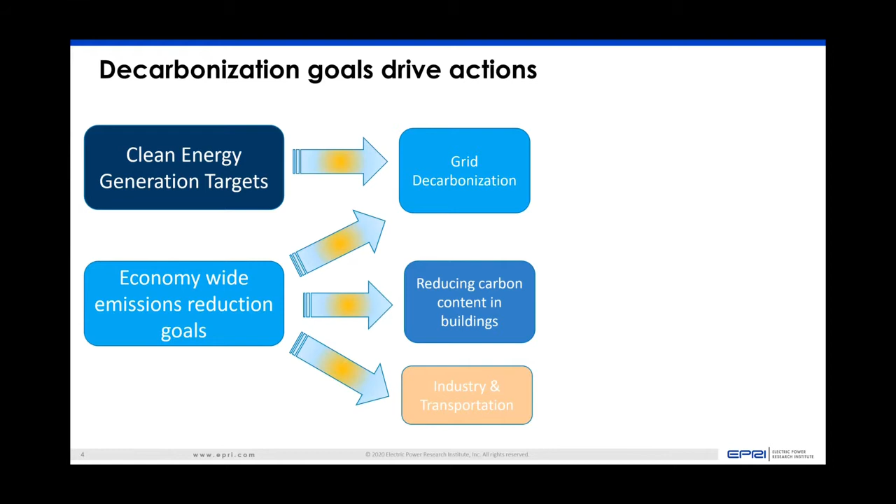So one of the key things is that as the grid gets cleaner, it makes it easier for cities and communities and states to get to the economy-wide emissions goals. But when you have a clean energy generation target, it mainly drives grid decarbonization. And how do they translate back into the building side? So the grid decarbonization is your driver for customer flexibility, demand response, storage, etc.

And then the building decarbonization targets, which are driven by the economy-wide decarb targets, then drive efficiency, electrification, embedded carbon in buildings, as well as low carbon fuels. And there's some interesting work going on in low carbon fuels, like getting hydrogen instead of natural gas into buildings, especially in Europe right now.

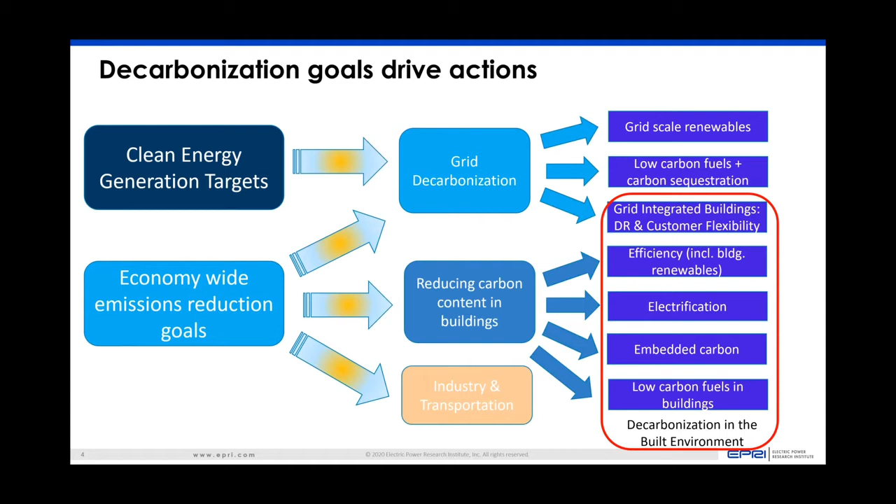So where are we with electrification? There is a lot of interest in electrification. There's a lot of efforts going on. City of Berkeley, you guys have been doing a great job trying to have that market transformation happen. But then there's also challenges that we are running into, right?

As we try to decarbonize our existing building stock and do electrification, how do we get through that peak of inflated expectations, get into that slope of enlightenment where most of our customers and most of our homeowners and builders feel like, hey, electrification is the way to go, that building electrification really helps them to get to their final targets.

So I call this our big challenge, which is how do you decarbonize our building stock at $1 a square foot? We all know what happened with the $1 per watt challenge with solar and how it helped solar scale, all the technology work that went in, the policy work, permitting work. Now, how do we do the same for a building stock? How do we attain this target of decarbonizing our building at $1 a square foot?

So if you think about it, if somebody has a 2,000 square foot home, how do we get the cost of decarbonizing that home down to about $2,000? So that's a pretty big challenge today, but hopefully there are ways to do it.

Quick question, Ram. Yes. Is there anything that might be whistling? A few of us can hear this. Like if I mute my computer, the whistle goes away. So I know it's something coming through Zoom. Do you think there's something in your background that could be making a very high-pitched whistle? Wow. Okay. I don't. I know you're like a technologist, so I'm not sure what you have around you. But don't worry, it's not bad. Okay. Sorry. Is it better? Perfect. Okay. Thank you.

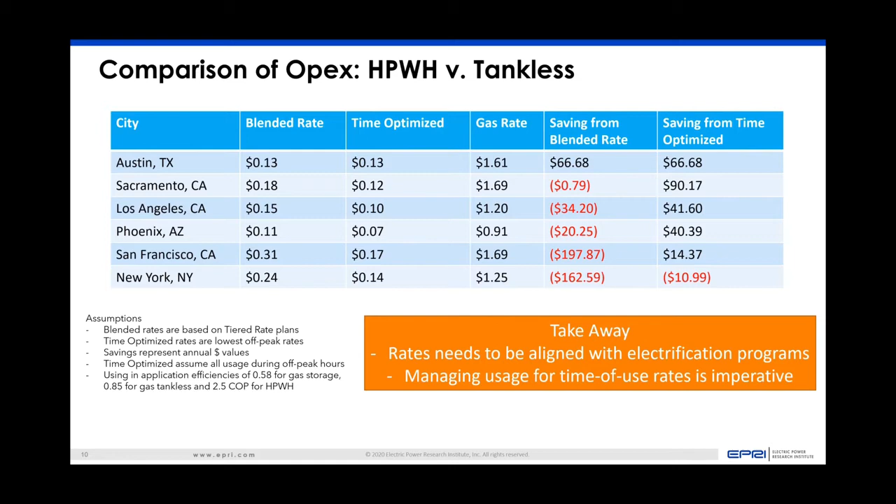So the way we look at it is, okay, flexibility, we should start looking at it and pricing it as a grid resource. And part of that would mean that we need to have open access, open APIs to battery storage, to heat pumps, to heat pump water heaters, so they can be managed as a grid resource, whether by the grid operators or by third parties. But they are not by itself a carbon savings measure within buildings.

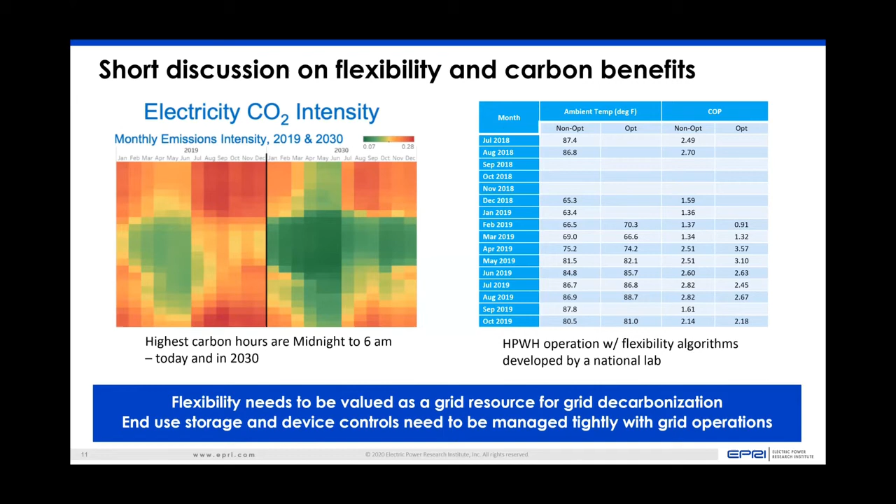Okay. That whistling is coming back a little bit, and I want to follow up that because that's sort of a tragic amount of efficiency loss, but continue. Thank you. So let me keep going at time.

So we know that rates are an issue. We'll get to that. We'll somehow figure it out. The other thing I wanted to say is that things like battery storage can be an enabler for electrification. Many customers might be concerned that if they electrify their homes, they're going to be operating on high peak rates, which is the 4 to 9 time period. That's when, of course, your air conditioner runs.

So we have to provide customers with a method and a mechanism so that we can help them shift their energy use off those peak hours, especially if you're going to ask them to electrify. So we'll have to figure out how to do all that. And then ultimately what that does is leads you back into that affordability issue.

Which is, hey, are we going to have customers where they're going to have to pay, I don't know, 10K for a heat pump, another $5,000 for a heat pump water heater, and now they have to add a battery, that's another $10,000. So it's an affordability issue that we'll have to address.

So what that means is that we have to get to work. We have to reduce our first cost of installation, reduce our customer energy burden. Things like combining efficiency and electrification can be very effective. Weatherization is, I think, a big enabler for electrification. So we have to look at how do you combine those.

We have to figure out how to enhance our customer benefits, indoor air quality, health benefits, right? Shape customer perceptions of new technologies. And finally, address code and grid readiness. And I'll get to that grid side piece.

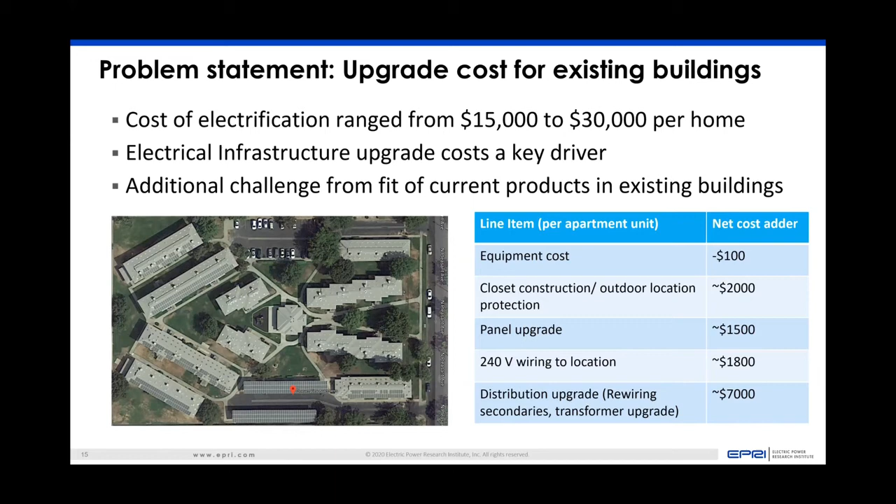Then you have to do the panel upgrades, the 240 volt wiring to location. So all these costs start adding up, right? So we have to figure out how can we approach technology, find technology solutions, application solutions that can help us avoid those costs.

Now, this is another project that we did in Ontario. The good news is that even after electrification, because of efficiency, the tenants' energy bills went down overall. Right. So what we find is that in a lot of affordable housing, the tenants pay the electric bill, but the owner usually pays the gas bill.

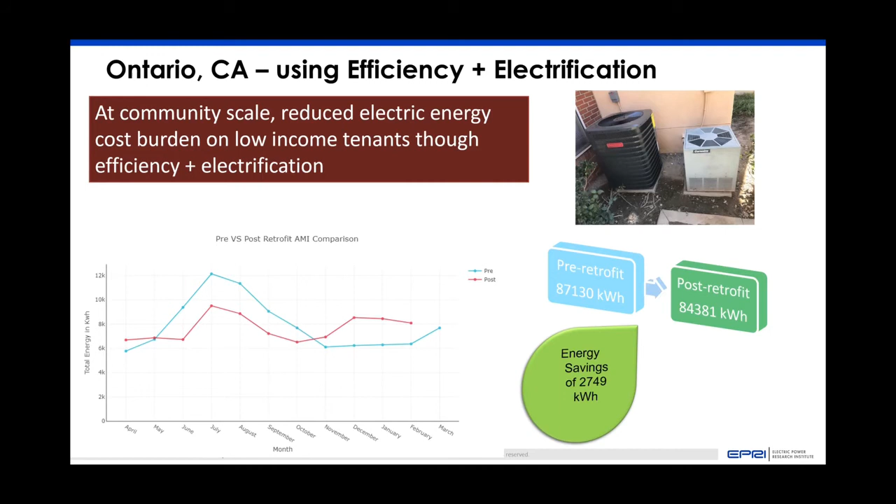So when you're electrifying, you're shifting the energy burden from the owner to the tenant. So it's really important that we figure out pathways by which electrification can reduce tenant energy bills, and efficiency becomes a core part of being able to help the tenants out. Just quick, I'll skip through this. The gas usage, of course, we were able to see like 70% reduction in gas usage from electrification.

But when we talk to the residents, I think one of the big benefits that they see is that through weatherization and window replacement, their indoor pollution levels go down substantially. So whether that's PM 2.5 from smoke, or whether it's from traffic pollution, whatever it is, weatherization measures make a big impact on the quality of life for the occupants.

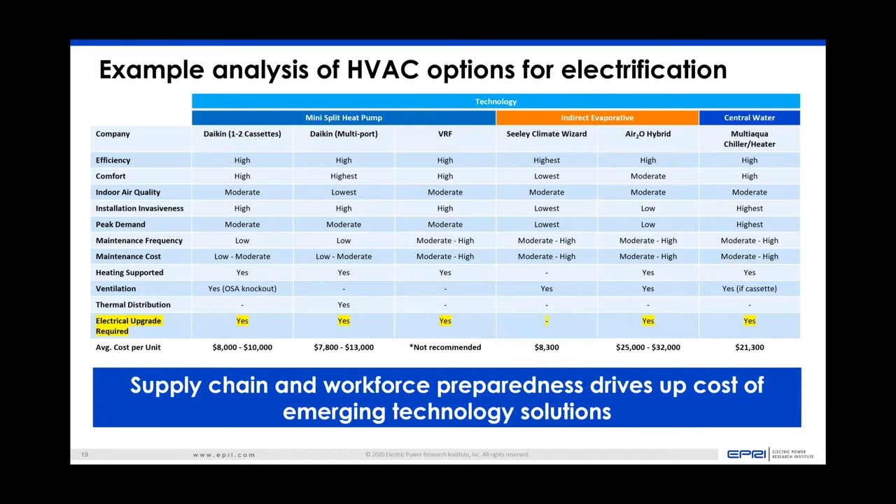Here's another example when we went through trying to electrify a whole apartment complex, and this one had swamp coolers. So we tried to replace them with compressor-based cooling, and essentially the cost numbers we ended up with for some of these apartments were significantly higher. So we went looking around the world, and thanks Sean. Sean led us to one of the viable products.

So we were able to bring in the 120 volt heat pump technology from Italy, brought it in, installed about 140 of these. Very easy to install. You don't need to break down walls, avoids things like asbestos mitigation because you are not breaking down walls. And we put out about 140 of these, got them field certified. They're all up and running.

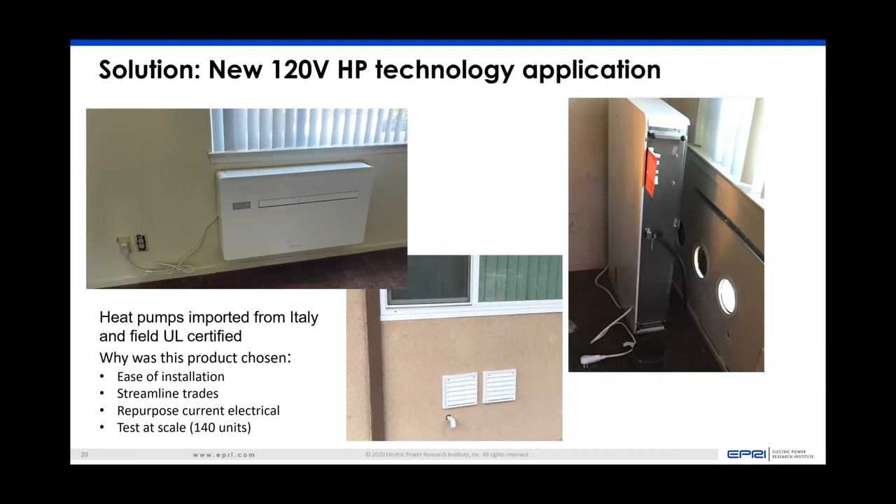So now all these tenants have a much better air conditioning system, but not using that much more energy. So the original swamp coolers, they were running straight out every day, day in, day out, right? And then with these systems, the energy use went up a little bit, but not very much. And so it's proving to really improve the quality of life for these customers.

And then can you clarify that? There is a modest increase in energy consumption, but is it coming with greater services? Is that what you're saying? Like, are people familiar with this?

Yes. So what people like is the fact that before, with the evaporative coolers, when it's 110 outside, you couldn't get those homes below like 85, 90, right? And it felt like a sauna. It felt like you were in Houston every day, right? And there are mold issues. There were a lot of indoor air quality issues.

And with these PTACs, you're doing two things. You're getting rid of wall heaters that have incomplete combustion issues. We are still looking at the indoor air quality data. We are collecting it, but we haven't fully analyzed it. But you could potentially be reducing the NOx and the carbon monoxide inside homes, as well as getting rid of things like mold issues, right? That come from having evaporative coolers.

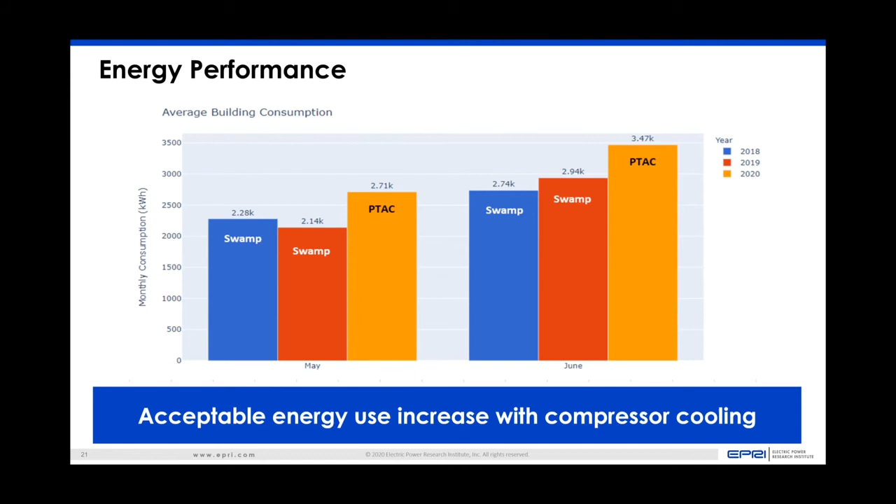So what can they get the apartments down to now when it's 110 outside? How comfortable are they? They are getting it down to 60 degrees. Woo! Okay, that has a different problem, but people are so happy because now they have the control. They have an app, so they're like, okay, I've never had proper cooling before, so they're just driving it straight down to 60, which creates a different set of problems because now your coils freeze up and everything.

So we are working on how do you set it up in like a hotel mode where you can have centralized management. Okay, if you go to hotels, right, there's the intercom systems that can limit how low you can take your temperatures down. So we are working on tuning that out, but these systems are really capable of providing really good cooling to these homes.

Yeah, and also my elderly mother is sensitive to getting overheated. She'll get like heat stroke easily, and it's been a big deal for me this summer. Even the cool environment where I'm at, to rush her inside a couple of times this summer and get her into cool weather. So I can understand people might need it to be 60 degrees sometimes to recover from it being 110 outside. Dear God. Okay, yeah, continue. Thank you.

No problem. And one of the things I wanted to mention, right, is that for a lot of coastal California where it's getting hotter and you don't have enough electrical service, that's one of the areas I think products like this could be useful, because these are 120-volt products that can go into existing buildings without requiring panel upgrades. So it's an applications issue, but that's really what led us to search for products that could work.

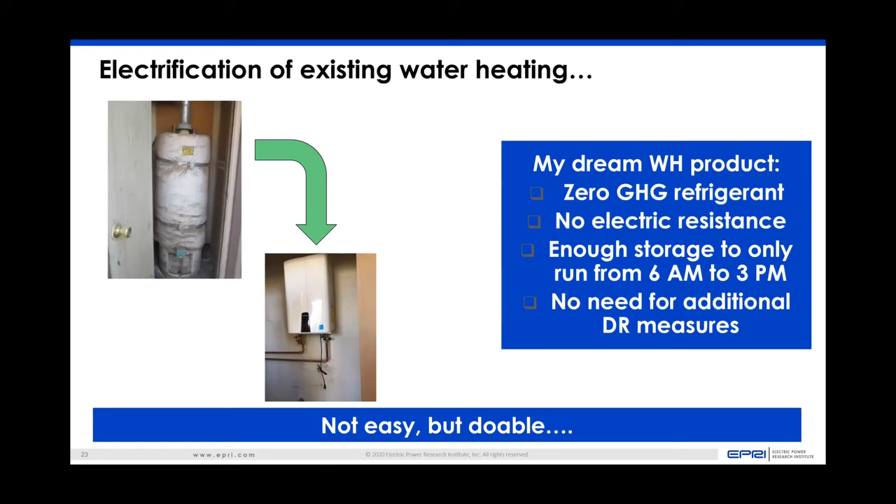So this is our experience on how we try to do water heating retrofits. So many of these apartment communities have 40-gallon storage water heaters. There is no direct one-on-one replacement for 40-gallon with heat pump water heaters. So we ended up going to carbon dioxide water heating, put in like a single storage tank that can service multiple units, as well as add additional storage.

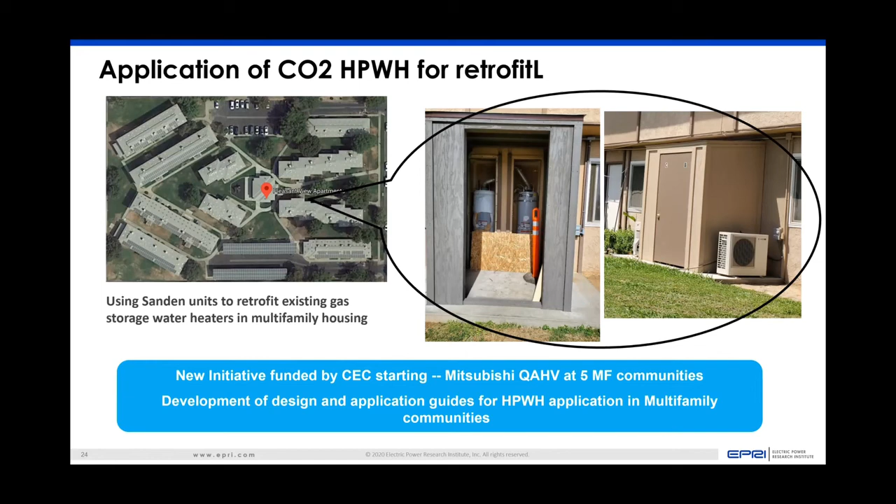So we are going to be working with Ecotope on a new project with the California Energy Commission to test the Mitsubishi QAHV systems also, as part of retrofit solutions for water heating for multifamily. I'll go through quickly.

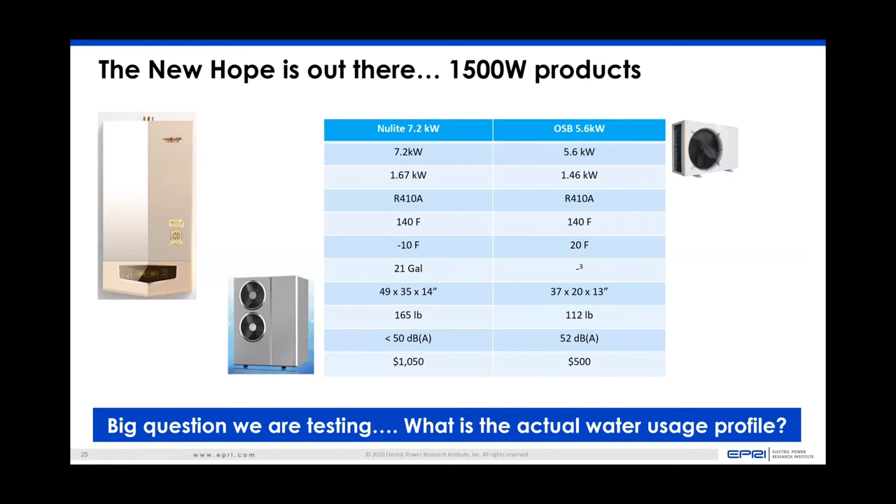There's New Hope. We are looking at what we call 1500-watt products for water heating that can go in as 110-volt systems. Some of these are in China, so we're bringing them in. We are testing them out. The whole goal is that you don't have to upgrade your electrical in your building. So there's some test facilities in Southern California where we are testing some of these, comparing them to existing water heating products. Hopefully some of these work out, where even if they're 220 today, if they're running at 1500 watts, hopefully they can be converted into 120-volt products that can be easily retrofitted into existing buildings.

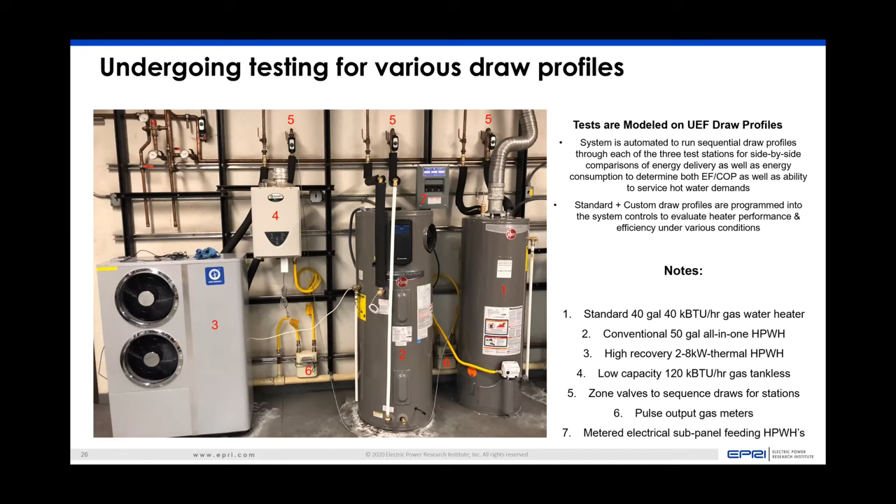So the whole concept here is, we know there are challenges with electrification of existing buildings. They're really driving up the cost of electrification. So what we're looking at is technology solutions that can really drive down the application cost. It's not about just getting the highest efficiency product out there, but trying to find products that can go in to electrify our existing building stock.

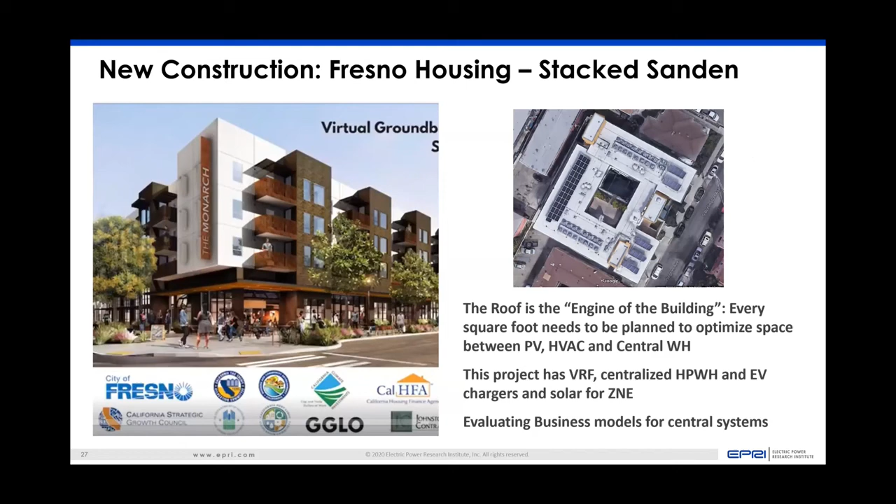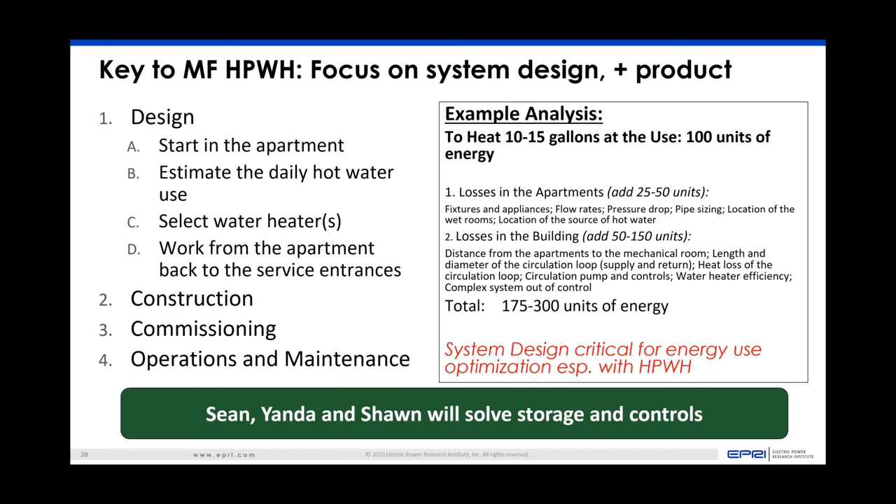New construction, I'll skip through it. We're again doing some work on VRF, centralized heat pump water heaters. And there's some business model issues around how utility rates can be passed on to tenants with centralized systems. Skip through it. Sean, you and Yanda are going to be working to solve this whole storage issue with central heat pump water heaters. Excited about it. We look forward to hearing more from you guys as you work on that. That's a very important thing, because the more you can figure out how to get your storage optimized, I think it's really going to help us with reducing the load on buildings, and help with existing building retrofits.

Another one that I'm excited about is a product. It's essentially an air handling product, but it's designed to slow down the air going through the air handler so that you can get better humidity control, which means that if you get better humidity control, you don't have to reheat the air. The way a lot of commercial buildings work today is your chiller cools your air down to like 50 degrees just to take the humidity out.

And then you have all this gas being used for reheat loops, right? So if we can get better humidity control so that you don't have to use gas for reheat, or even take the reheat load low enough so that you can use heat from water heaters for reheat, then you can start electrifying your big commercial buildings.

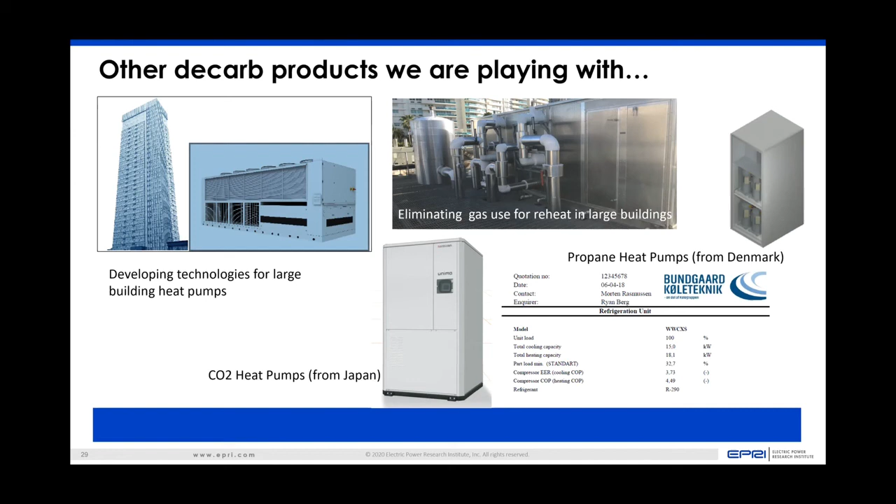And then finally, another product that we are looking at and doing some research on is high lift heat pumps that can be used for large commercial buildings. So just a whole range of different technologies that we are working with. With that, I think that's the last one. That was a random walk in the woods, starting from how consumers might make their choices to new products and technologies that might help us transform the building stock. So with that.

Fantastic, man. It was delightful to see some of the products that you're testing. I've been dying to just see them. What are you doing back there? That's awesome. Congratulations, I think you're bringing forth some radical change in product availability, which of course is a linchpin to a lot of our work, just having the appropriate products through inexpensive electrification. A question for you. You wanted to sort of do a $1 square foot challenge. What is your thinking on how that could be accomplished for electrification?

Great question, Sean. I think first, what we are hearing from builders, the supply chain for heat pumps is not working. So even builders who are doing new all electric communities today are going back to gas because their supply chains are charging $3,000 more for heat pumps that should actually cost less. I can go buy a heat pump in Alabama that's $1,000 less than a gas furnace system, but that same product costs $3,000 more in California, right? So we'll have to fix the supply chain for these products.

The second is if we can get our grid ready, right? Let's invest in the grid, put in more transformers, more wiring so that we are electrification ready, so that the cost doesn't fall on the customer. That's a big one. And then third is getting all these products tested and applications vetted out and our workforce ready so that we can start launching these and scaling these as many of our cities start moving these programs forward.